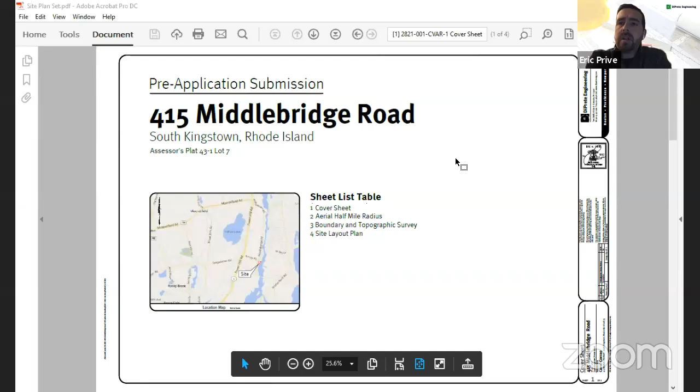So the property is located at 415 Middlebridge Road. There we go. Perfect. Thank you, Jay. It's Assessor's Plat 43-1, Lot 7. It's a 3.13 acre parcel. It's zoned R20, so 20,000 square feet per lot. I'm just going to draw on here. There's an existing home on the property, here at 415 Middlebridge Road.

There's a driveway that comes in directly off of Middlebridge Road, has a small circular driveway, and also goes to the garage. Just to note, north is actually showing to the left on these plans because it fit on the page better. There is a coastal feature located along the eastern side of the property, with the wetland flag series along here. It's a wetland associated with the Narrow River. There's an existing dock as well.

You can see the tree line goes right to the edge of the coastal feature today. So this is all a grass yard associated with the existing home. This area is serviced by municipal water and sewer directly in Middlebridge Road. There's a gravity sewer line directly in front of the property, and the existing home is serviced by the gravity sewer.

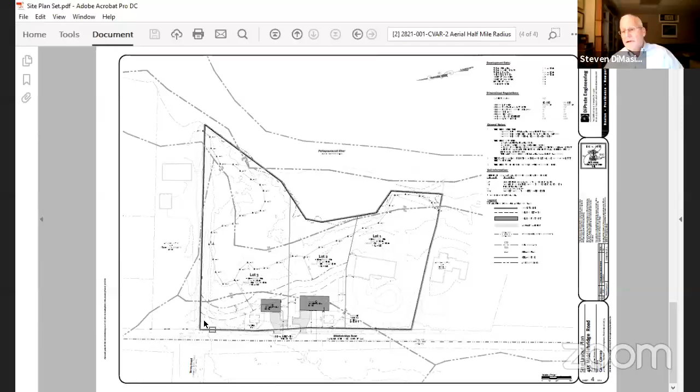Thank you, Eric. Any questions from board members? I have one. Go ahead. Mr. Prive, given the fact that this is within the Narrow River watershed, have you thought at all about trying to protect the integrity of such with future homeowners, say any limitations on pesticide or herbicide use? We haven't specifically discussed that yet. At the same point, I think that would be something that CRMC would also be talking about at that point. Actually, I forgot a pretty major point on this, so I apologize.

As I mentioned, the tree line today is approximately right along the coastal feature here. The area within 50 feet of this coastal feature would all be replanted and reestablished as a vegetated buffer zone in here. So that would be recapturing an area that is currently lawn today that would be vegetated as well. I forgot that's kind of a major feature to forget there, so I apologize for that. But yeah, this will all be revegetated and reestablished as part of the CRMC permitting process as well.

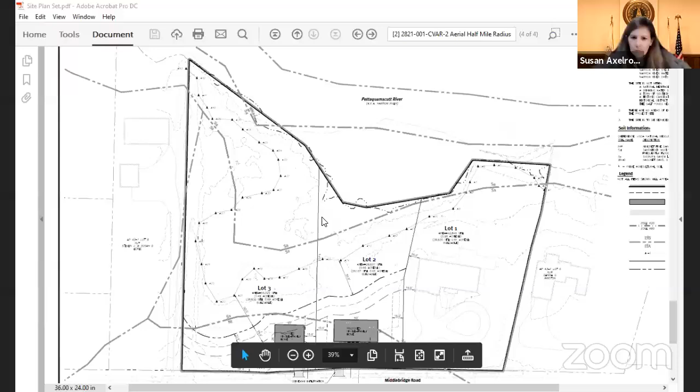So, Ms. Mack, we have not fully discussed that, but I would envision that CRMC would also have some sort of discussion like that as well. Great, thank you. Anyone else? Susan? Prive, this is Susan. Had you considered doing a shared driveway? We hadn't. It's something that we can talk about with the owners as well. It may make sense in this application. So yeah, it's something to consider for sure.

Typically, we do ask for those quite often in cases like this. And to Susan's point, because they're so close together, it seems like it would be better to combine them. I don't know if Rich has any comment about the curb cuts along that part of Middlebridge Road, but that is in the vicinity of where Torrey Road comes down, so.

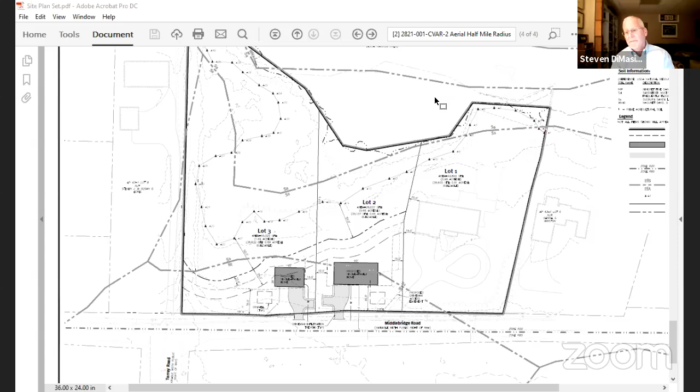It is, but we've installed a stop sign there recently. And so traffic is slowing down through that area as it comes up to the stop sign. Also across the street from this is a land trust property. It's vacant. So I'm not necessarily too concerned about driveways, although we always prefer that it would be a shared driveway, just fewer curb cuts the better, so. Okay.

Any comments from staff? Mr. Chairman, our only primary one, and it may be something the applicants considered, is the northernmost lot and the proximity of that turnaround and the functionality of that long-term, basically right on the property line. Well, that might have to be switched if they do the combined driveway.

Could you please just restate that, Mr. Rabbit? I apologize, I kind of missed a piece of that there. That northernmost lot, which has a southern jug handle to it for its turnaround, is on the property line. If you have the ability to slide infrastructure north. Got it. Yeah, we could look at that. We could always possibly put the hammerhead, the turnaround, and go into this side over here as well. Yep, that's certainly something to consider.

Okay. And Jay, as this project moves forward, do we have to have a public hearing because it's asking for no waivers and there's no street creation? I'm not aware of any requirement for a public hearing. Mr. Chairman, this is Jay Parker. This is a straightforward minor subdivision with no waivers, so there is no. All right. Well, I was just curious because typically that goes to the planning department and unless there is an issue, they usually move it along. If there's an issue, they usually refer it to the planning board. So that's why I was asking the question.

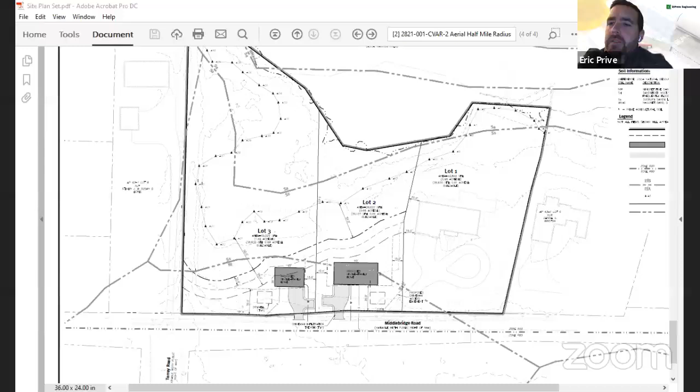Okay, Mr. Prive, do you have any questions of the board? Sometimes with the minor subdivisions, it's just helpful to get the early feedback from the planning board and make sure there wasn't an aha moment. I'd prefer to have the feedback before we go and officially engineer it. So appreciate the feedback given tonight. Well, we appreciate that as well. And you heard the comments from Maria about the CRMC maybe and the combined driveway. So we'll see you in the future. Excellent. Thanks for your time tonight. All right, thank you.

All right, moving along. Next item on our agenda is major land development project pre-app conceptual plan for the South County Post and Beam on 551 Liberty Lane, West Kingston. Do we have anybody representing the applicant, Jay? Yes, Mr. Chairman, they're coming in as we speak. Hi, good evening. David Russo, professional engineer with DiPrete Engineering, representing the applicant, South County Post and Beam. If they're present, Jay, can you let them in? Josh and Ken. Thank you, Jay. Does Jenna want to come in as well? No, it's all set.

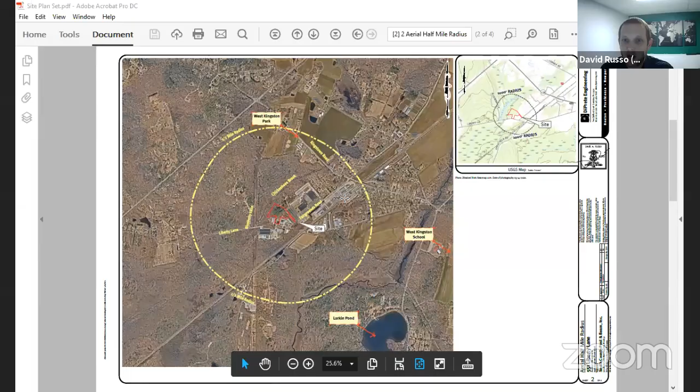So we're here tonight for a pre-application for a major land development project located on AP 21-2, lot 21. The site has a total acreage of 6.3 acres. It's an industrial zone property. It has frontage on Liberty Lane and Fairgrounds Road, so 2 points of frontage. There's an existing building located on the southern tip of the site, off of Liberty Lane. David, I just gave you control of my mouse. Can you see my mouse now? Yep. Can I click back a page too, Jay? Absolutely. All right, great.

So there's an existing building located off of Liberty Lane here. The rest of the site is wooded. They also have a secondary access point on this side of the site. The wetlands on the site are located in the northern tip, flagged by a wetland biologist, with a 50-foot buffer. The property line shown is using best available information; we haven't completed a full class 1 survey yet. The topography generally slopes down towards the wetland area, north and west. The applicant's existing business is on a separate property on the corner of Liberty Lane and Fairgrounds Road.

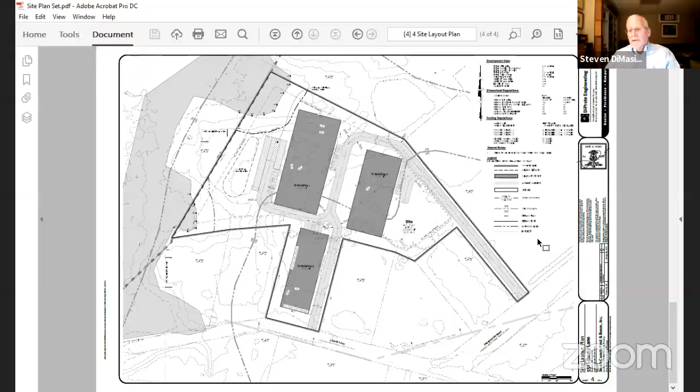So I think the discussion needs to be expanded with the applicant on the potential use of those buildings and what those pertain to, and potentially requiring to narrow that focus down. Okay. Warehouse has different implications than manufacturing. So again, I think we just need to continue those discussions with the applicant's representatives as well as the applicant. Josh or Ken, can you maybe elaborate or answer that question?

Sure. This is Josh Bouvier. Our thought process is building 2 is what we're really looking to use for our business expansion. And there's a pretty good amount of infrastructure expense and work that would make the other buildings difficult to build or plan for at a future date. So our thought process was to go and get the approvals for everything in one motion. As far as what the building uses are, we really have no plan.

We're happy to, if there's some other things we need to do, if we need more parking, whatever there might be for the most restrictive use, we're happy to address that and allow for it. But we're hesitant to take anything off the table for whatever a future tenant or future business direction might be.

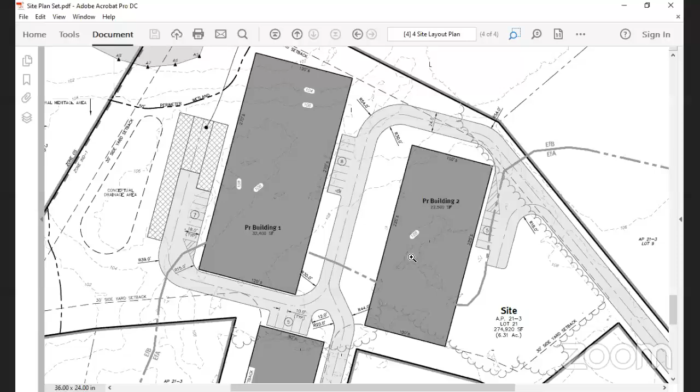So Josh, initially, if this plan moved ahead, you would start with building 2? Yeah, the plan would be to build out the full infrastructure for the drainage, clearing and roads, and then construct building 2, and then buildings 1 and 3 would be built as the need was there for them. Okay.

But as you can imagine, all of the underground water work and drainage and so forth, it's going to be pretty disruptive if we have to do that around the existing operation. And actually, I think based on a similar project, the town would require that you put in all those utilities ahead of time anyway, so. We want to go through the process with DEM to get all of this approved in one motion.

So Jamie, how could we handle reviewing this if we know the use of building 2 and they want to submit uses at a later date for building 1 and 3? Again, we can work with the applicant as well as legal counsel that it may be a phased project where you're approving one building and you're approving, in essence, the footprint of a building to be up to a certain size, and that the board still looks at the final use.

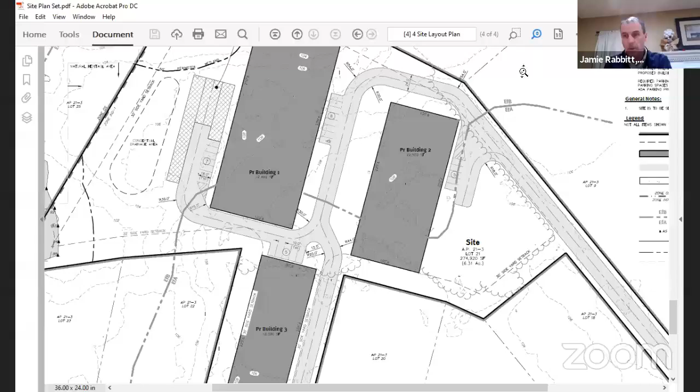It gets more into the manufacturing aspect of it. Textile production, manufacturing, food production, manufacturing, where your wastewater may change. And I'm sure John Chalk will weigh in on that, a warehouse is going to have a different flow than a wet food production facility. So again, we can look at like uses that can fall within the categories of this.

Right now you have 3 buildings with no planned loading docks. If it was a food processing facility, you're gonna have truck loading docks, and you're gonna have to accommodate a different circulation pattern for a tractor trailer. So to simply say building 3 can have any use as of right within the zone, we got to make some provisions for the uses and make sure they're accommodated along the list.

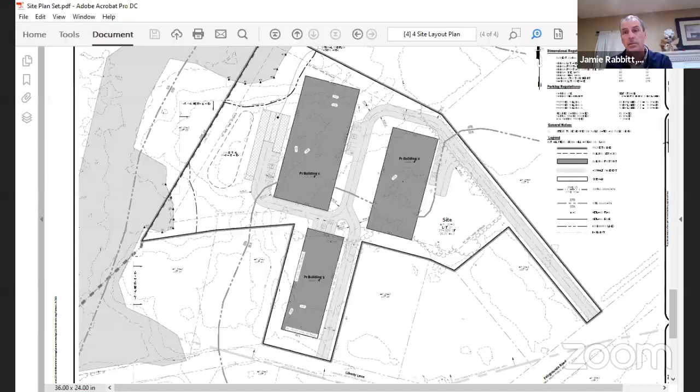I think the applicant has stated that he's more than willing to go through that exercise, and potentially there are some that the commission can deem not approved as part of this process because the infrastructure and other ancillary site conditions would be drastically modified if those uses were anticipated. So again, Mr. DiStefano, to your point, I think there are some uses we can categorize as very similar, and then other uses that we can simply categorize as very different. That sounds reasonable to me.

Okay, yeah, and you can always sit down with staff and go through the uses for that area and maybe eliminate some and discuss some, and so when you come back to the planning board, we might have some items eliminated from that. Mr. Chair? Go ahead, Jay. I just wanted to float the idea and see if this would work for both the board and the applicant.

But if the application were to proceed as indicated previously under a phased approach, with the infrastructure, let's say the utilities, the driveway, and building 2 getting approval in the first stage, but leaving the rest of the site blank until the applicant really determines what direction they want to go, it would make the second phase coming back before the planning board relatively easy because you know the size of the proposed structures essentially.

There may be some modifications perhaps that the applicant might want to entertain, but then it would give them the opportunity to really figure out what direction they wanted to go in and come in with specific uses rather than drill through the use code trying to figure out which one might work, which one wouldn't. As a former zoning official, it's always difficult to deal with an open-ended question like that. A lot of those uses, they may not have any intent to actually establish there.

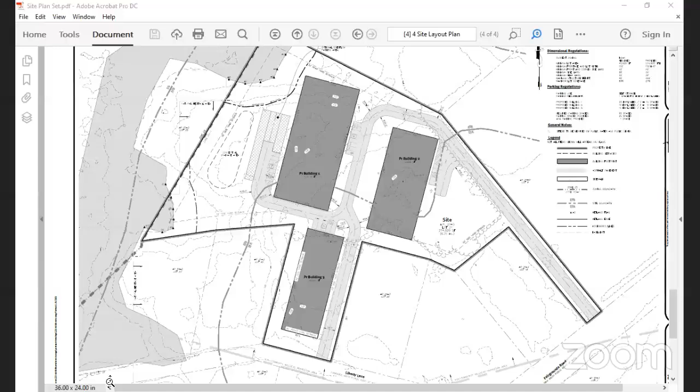I think our preference would be to combine and work with staff to come up with a reduced list of uses, and we'll see down that road. And then if we have a future use that's not on that list, then we'll come back to the board for discussion.

This is Rich Burbank. Just a quick question. I know that the new regulations are going to be out for the wetlands, new guidance on that. It does specify, I believe, from my review, that in order to submit, well, I guess it'd be RIPDES in this case, but no, it'll be a wetland submission, you have to have your master plan approval in place to even apply. So I don't know how long that is out.

Those regs are out, but now how does that affect this if you're midstream through the process and you don't have your DEM approval, you'll have to come in for master plan. I don't know how it would work.

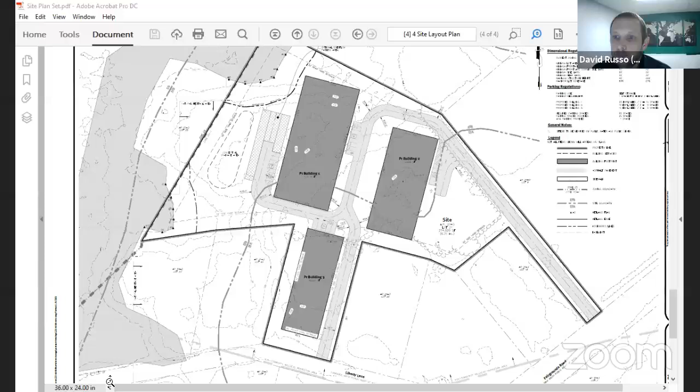I don't think those regs are, from what I gather, they have a little ways to go. There's a few questions that have been asked. They're still looking into it. That was actually one of the questions asked at the forum that they had. So I think a lot of that's still being looked into, Rich. Yeah, and that's fine. I'm just making you aware. I think that's a good point that Rich brings up, even though the finalization of the regs is still somewhat in limbo. That was something that was brought up about when the permit should be made available.

I appreciate that the applicant has come, this shows some of the benefits of the pre-application procedure, where the discussion can continue to happen and come to the planning board. And I think that it provides in the long term, this one and the last application, for a more efficient process. So thank you.

So Amy, it sounds like the applicant wants to move ahead on a combined hearing. You can add that, this is Amy, then you can ask for a motion to that effect. And Amy, as long as that would not preclude any kind of phased approach? I don't think it would preclude it. Staff and the applicant are gonna have to think carefully about how to present that to the board. I don't think it would legally preclude it. Okay. Any other comments from board members?

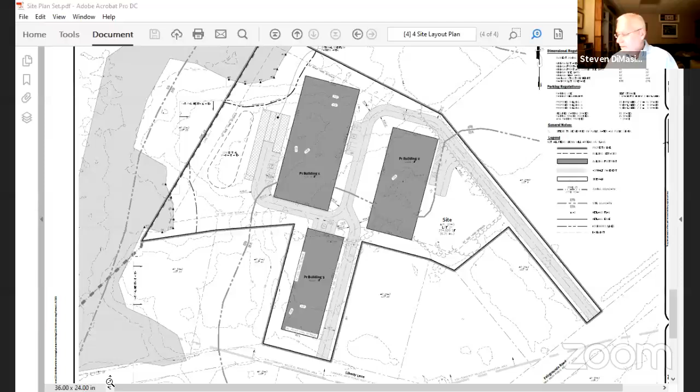All right, staff has prepared a motion for us. I'll be happy to make that motion. Okay, the South Kingstown Planning Board hereby grants the request of the applicant South County Post and Beam to combine the conceptual master plan and preliminary plan stages of review for the proposed major land development project located at 551 Liberty Lane, Assessors Plat 21-3 Lot 21. The applicant shall be required to meet the application requirements for both the conceptual master plan and preliminary plan stages of review prior to scheduling the required public hearing.

So we have a motion by Maria. Do we have a second? We have a second from Paul. Any discussion? Pam, will you take the vote, please? Yes, sir. Paul Jordan, aye. Peter DiStefano, aye. Susan Axelrod, aye. Joe Murphy, aye. Maria Mack, aye. Steve DiMasi, aye. And Pam Rubinoff, aye. Okay, motion passes unanimously. We'll see you at the next level. Thank you all. Thank you, guys.

Next item on our agenda is a major land development project conceptual master plan for the residents at Holly. We have the applicant. Mr. Holberg. Yes, I'm here. Okay. We did have a staff comment, Jamie. Jamie Rabbitt, Planning Director. I know the applicant submitted some revised plans that show some revisions to the extension of sidewalk to the north, revisions to the internal pedestrian path, as well as some architecture or renderings associated with the units being proposed to be built. We've also had discussions along the way about passenger vehicle movements along Holley Street, as well as turning into the site.

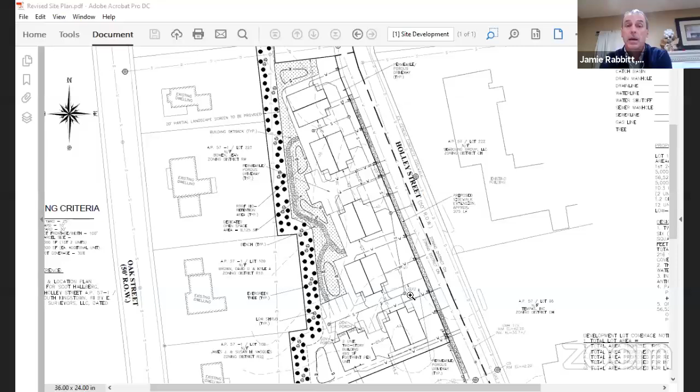So, thank you, Jay. So if a vehicle is headed north on Holley Street and they need to make a left-hand turn into the first 3 duplexes, in order to make the turning movement and get to that northeasternmost unit, that vehicle actually has to get on the southern side of that access drive. So if there was a car exiting in an easterly direction towards Holley, the car entering the facility who needed to get into Unit 1 can't make that turning movement. So either it's got to stop on Holley Street, or the car exiting the site has to back up. If there was greater dimension between the 2 units, in essence,

Jay, if you just bear with me a moment. And again, if the commission members or applicant have a question, I'll try and go over this carefully. Again, that turning movement, if you follow my cursor, that car has to turn. In order to make the swing into the garage, they have to stay on the southern side. Jamie, we can't see your cursor. Yeah, Jamie, I don't know if you have to accept the control. Oh, sorry. Jay, I'm just going to pull up a quick PowerPoint. Okay. I have the turning movements.

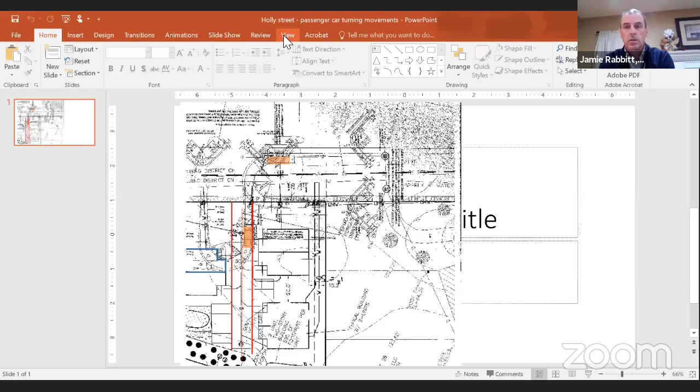And can the board members see this graphic representation? If you can enlarge it, yes. I will do so. We'll try and do this first. Is that better? And again, sorry, it's an overlay.

So the first at the top of the screen is an orange rectangle that represents a passenger vehicle. The second orange block is a passenger vehicle, which would be headed in an easterly direction to the intersection of Holley Street. To the mid left of the screen is that first northeastern unit. And what you see is that orange car makes a left-hand turn, and in order to get into that unit, in essence, is parked where that second orange rectangle is. And they're crossing the center line in order to make that turning movement.

If the units were further apart, that conflict would not exist because the driveway could be relocated between the units in a manner that eliminates that conflict. Any questions from board members on that graphic? Right. The turning, just for clarification, Mr. Chairman, the turning templates are from the ITE manual. Okay, to the traffic engineers. All right.

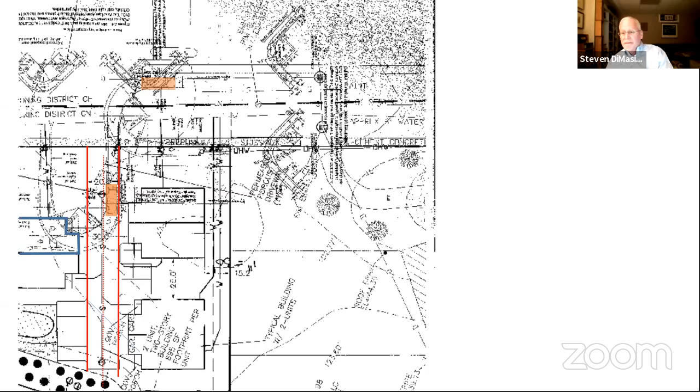Mr. Kenyon, any comment on the issue that Mr. Rabbitt has brought up? For the record, I'm John Kenyon, attorney for the applicant, Scott Hallberg. This is actually the first that I'm hearing this. I don't know if the applicant or his engineer were made aware of these issues. The applicant's engineer is not here tonight. He has his son's 10th birthday. We thought we had the engineering issues resolved on this. So obviously, in order to address those concerns, we'd have to get a traffic engineer to look at this. Okay. All right.

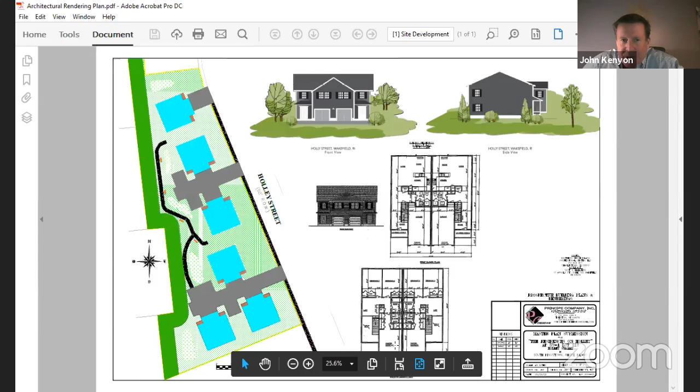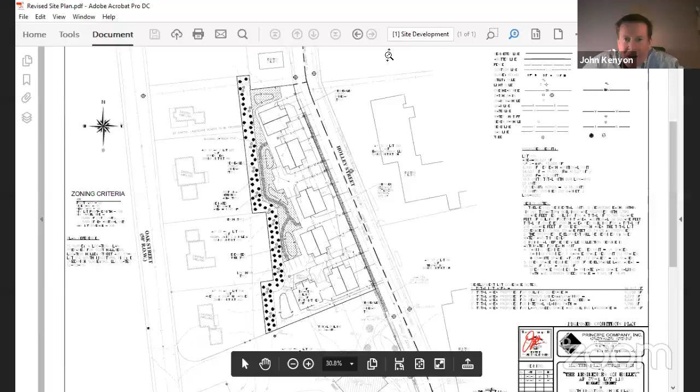The applicant also submitted some architectural designs. Yes, so at the last meeting, there was a request made that the applicant provide a breakdown in the amount of the property covered by buildings, driveways, the buffer, and the remaining land. So the plan that's up there now actually shows it color-coded, and then they also submitted a revised site plan that has the calculations for the amount of land for each of those uses. The revised site plan also shows the proposed sidewalks extending along the property until the last driveway. They provided architecturals showing schematics of the proposed units.

And at the end of the meeting, the board had asked the applicant if he was willing to increase the number of LMI units. And what we were going to suggest tonight is, as the board knows, based on the inclusionary zoning, he's required to provide 2 units, which are also the density bonus. And the inclusionary zoning requires that those be at 80% AMI. So tonight, the applicant was going to propose an additional LMI unit for a total of 3, but with the third unit to be at 120% of AMI. My understanding is that that unit would still count towards the town's goal of 10%, but it would also provide a range of affordability, which is one of the goals of the town to provide multiple types of affordable units.

John, I did notice on that plan that they haven't been identified where those units are going to be. And they should be, at least the 2 that were proposed. And if you're going to offer a third one, they should be labeled on that plan, so we know which units they are and that they're distributed throughout that development. Sure, we can do that.

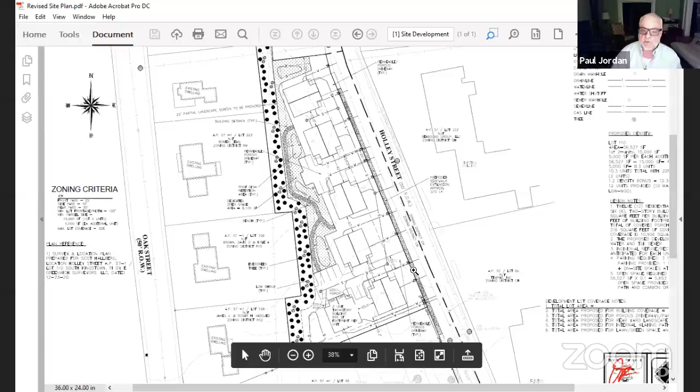Thank you, Mr. Kenyon. Other comments from board members? Paul Jordan. Go ahead, Paul. I just have a question for Jamie about this turning radius question in that southernmost driveway. I'm curious about sight lines across the lawn. I guess my question is, is that turning radius something that's required, or you just see it as a potential issue with that driveway?

Mr. Jordan, it's actually for the southern driveway entrance and the central driveway entrance. The issues are the same. Yep. And again, it's accommodating. There's maybe 7 or 8 feet in front of those garage doors to the main aisle. So because they're constrained by the 30 feet between the units, accommodating the turning movement and the radius is, in essence, you can't accommodate that unless you're on the opposite side of the road.

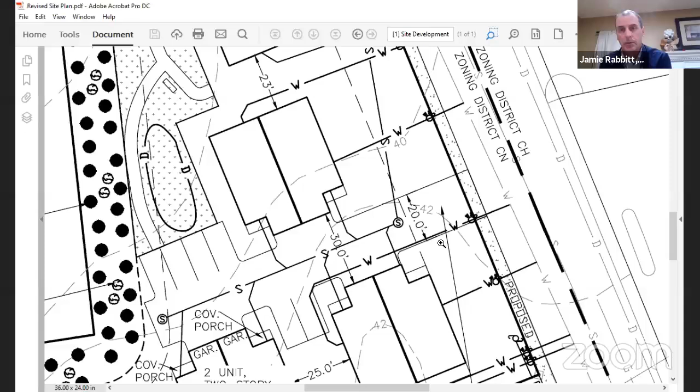But it's not a road, it's a driveway. I mean, I'm thinking, I realize. It's a driveway to a multi-family project. It's not a driveway to a single family. If that was a single family home, absolutely no issues. But it's a shared common access to the traveling public. Okay, thank you. Susan, you had your hand up.

Hi, this is Susan. I do have a quick question. Could you put up the artist's renderings of the houses again, the other photograph? I am concerned, looking at the plan, that the view from Holley Street into the neighborhood is that blank wall side of the building, and there are 4 in a row coming down Holley Street. And I wonder if you've considered maybe swinging the door around to the side with a little walking path or some other way to break up so that to the rest of town, it doesn't look like the side view of all of those buildings lined up on Holley Street.

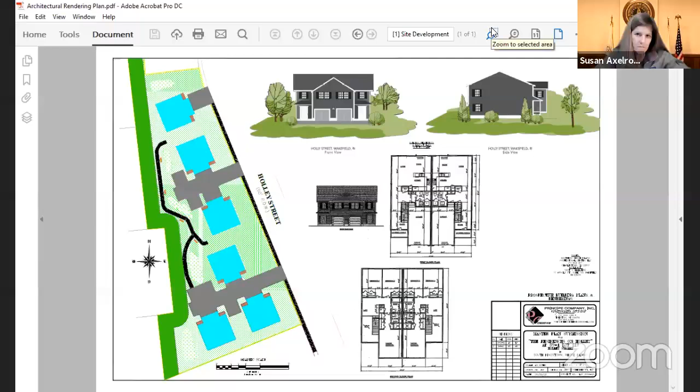I'm grateful that you don't have garage doors facing Holley Street, but the side of the building isn't very pretty. Can there be some detail added to it, or the doorway moved, or some other way to break up that blank wall? Yes, Scott Hallberg. Sure, that door could be moved. My impression from the last meeting was that we didn't want anything facing Holley Street, and that's why everything faces interior, except for the northernmost building. But certainly that door could be moved to the side.

Mr. Chairman, Rabbitt, Planning Director. I think, Mr. Hallberg, to Mrs. Axelrod's question, the orientation of the garage doors was the most concerning aspect of the development with regards to street presence. But I think you've stated that you're willing to look at establishing, in essence, a street presence for those street side units. So that would be, I think, 4 of them, correct? Yeah, that's fine. Yeah, 4. Yep, that's great, thank you. You're welcome. Any other board members have a comment?

I had a question. Jamie, with that turning radius issue, suppose he combined those buildings and he had 3 buildings with 4 units.

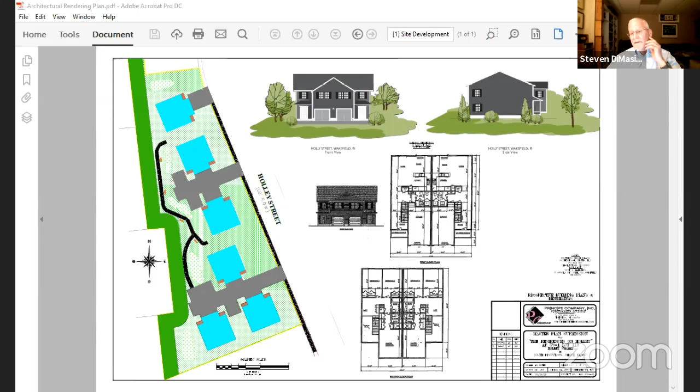That he'd be able to increase his distance between, or get his maybe 50 feet distance required, and he'd eliminate the need for that waiver. Yeah, the applicant may have a few opportunities to potentially get similar yield within the development without drawing in a Zoom setting this evening. I think from my perspective, there's an important aspect.

If the board, in working with the applicant, concedes to the fact the applicant's proposing a sidewalk along Holley Street, and that the interior pedestrian movements don't need to be formal, they could be informal, just across grass, to Mrs. Mack's point, that could allow the applicant a little more flexibility in the unit design and potentially going from a duplex to a triplex in a couple locations. But again, that's a discussion that staff would encourage and look forward to having with the applicant. Again, I know they put considerable work into this design, but there are some options available to them.

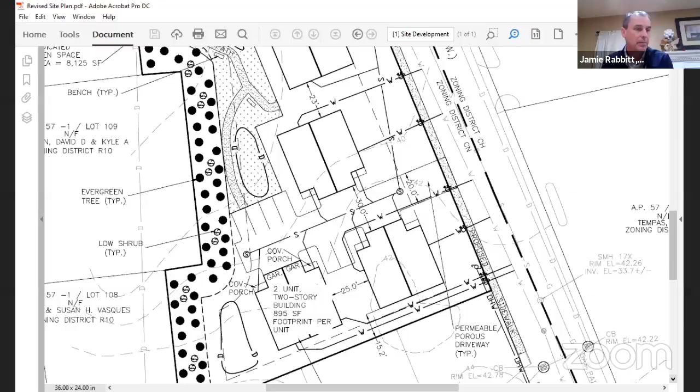I have a question. How would you look at it if we eliminated garages and just had surface parking? Again, my goal would be to eliminate the conflict, Mr. Hallberg. And again, there are multiple ways to address that by eliminating the garages, sliding some units, going from duplex to triplex. And again, I'm more than willing to have that conversation with your design team or just with you and have that discussion on some options that may be viable. Okay, thank you very much.

All right. Any other comments from staff or board members? All right, I guess, Mr. Kenyon, we have some work to do yet on this. Yes, Mr. Chairman. So the point that was just brought up, we raised at the last meeting that you could reduce or eliminate some of these waivers by having larger buildings. And we didn't think that's what the board wanted. We thought you wanted more of a scaled down residential look rather than larger buildings with more units. So that's why we thought it was in the best interest of planning to grant the waivers.

But if the board is telling us that you want larger buildings with more units, then we can certainly look into that. Well, that was only my opinion, looking at the graphics when Mr. Rabbitt pointed out the turning issue. So again, because the buildings were too close, my conclusion was that perhaps you could combine those buildings, but I don't know if the rest of the board members feel the same way about that or would entertain that. So perhaps they can have an opinion on that.

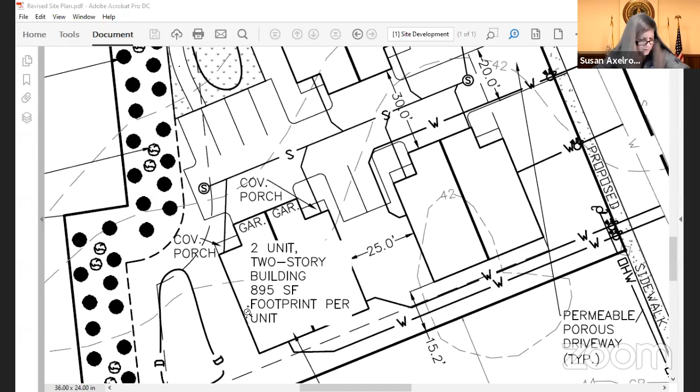Okay. Quick math. Our original notes that I have these at 2 720 square foot units. Was that never accurate? No, 720 per footprint per unit. And then there's a second floor, Susan. Okay, second floor, right? And then back out a 1-stall garage. Okay, got it. Sorry, thanks.

Looks like we have a hand up in the attendees. Jay, if you can bring in that phone number. Yes, the phone number 783-0294. If you can unmute yourself.

Hi, this is Autumn Francesca at 96 Oak Street. My question was exactly the one that was just asked previously. So just to confirm, there are 12 proposed residences, and each residence will be approximately 1,300 square feet, and they're going to have 2 bedrooms. Is that correct? I'll let Mr. Hallberg answer that. Yeah, that is correct. Thank you. Yeah, that was my only question. You're welcome. Right, while we're in the attendees, any other questions of the applicant?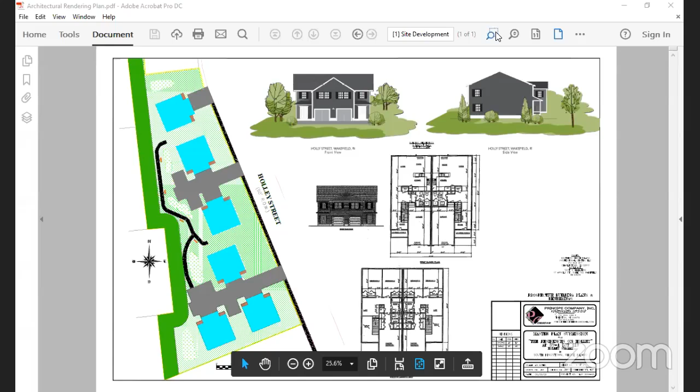There, if they do, it's an error. It was mostly architectural, not an interior footprint. That might have made it to the plan. I apologize for that. They're 2-bedroom units. This was more about the exterior architectural view from Holly Street and Oak Street surrounding area.

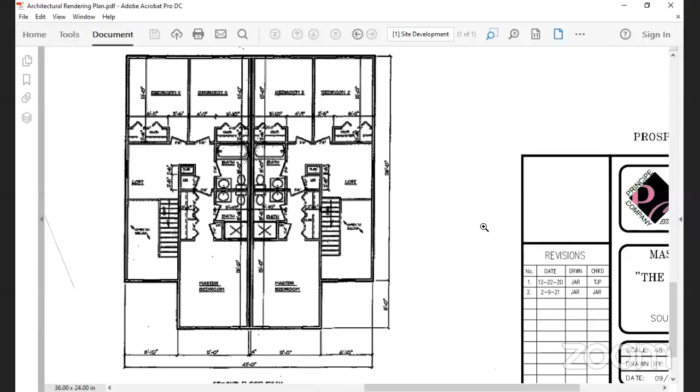Okay, looks like Sean has muted himself. No, that's fine. I was just on the clarification because it says a 2-bedroom and then the renderings show a 3-bedroom. Yeah, okay. I apologize for that. Thank you for pointing that out.

Okay, so Mr. Ken, you want to come back to us at the next meeting? Sure, Mr. Chairman. I just wanted to note that the comprehensive permit was mentioned earlier. To be eligible for a comprehensive permit, the applicant would have to provide 3 affordable units, which is what we're proposing to do. Just so the board's aware of that, my recommendation to him would be to file as a comprehensive permit with 3 units affordable.

Okay. But you do know that at this point in time, where the applicant is at with this particular project, it would probably be more efficient from a time perspective for him to continue with this inclusionary project. Don't you think? Normally I would, but things seem to keep changing as we come back. So I'll have to talk with them.

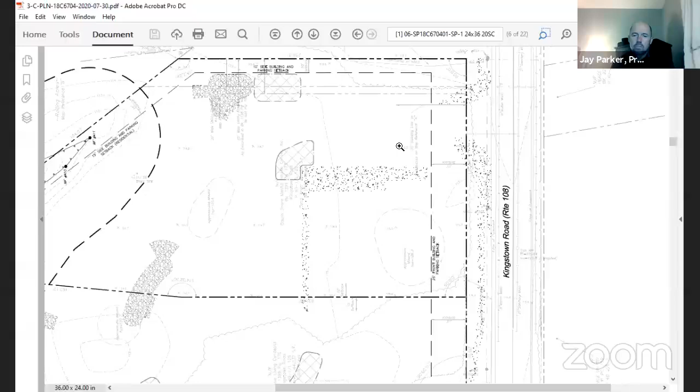So the driveway, as I was speaking about before, circling where my hand is now. As you move into the site, we do have the proposed handicap parking spaces, as this is adjacent to the main entrance of the building. We do show in this darker gray proposed parking on the side and the rear of the facility.

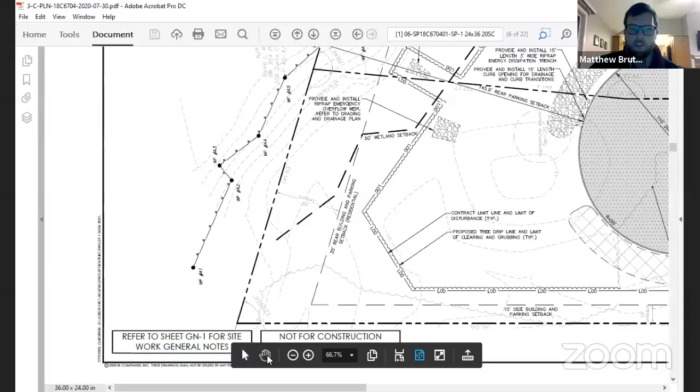These parking spaces are 9 feet wide by 20 feet deep, which is an increase in size to a more traditional parking space. The original application, when we only had 1 parcel of land and not 2, was in compliance with your regulations, but it was a much tighter squeeze for especially larger vehicles. Oops, I apologize. Let me just change this here to a hand.

As we move around the back of the building, you can see we've incorporated the additional adjacent land to provide this rear loading enclosure area and concrete pad. This will allow loading and unloading of merchandise to be walked directly back into the retail development, and also provides the turnaround capabilities for the truck on site that will not interfere with customers or employees within the parking lot.

That was a topic that was brought up during the original application as well, crossing traffic patterns with delivery vehicles. So those are a couple items that I just wanted to point out. In general, if the board has not changed dramatically since the last application, we do show sidewalk along the frontage, which previously went beyond the frontage of the property. That is now included and does go to the abutting driveway next door.

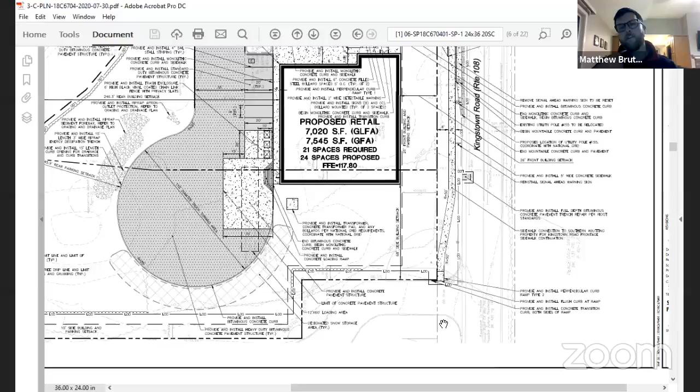And as I'm sure everyone is familiar with this area, there is a sidewalk on the other driveway for the abutter that does service an existing bus stop that is to remain. Jay, I think I can move forward a little bit. Yeah, Rob. Just gonna move forward a little bit further. This is the truck movement that was reviewed and approved by DOT, showing the truck movement off the road, circulating the site and back onto the road.

We do show here an updated grading and drainage plan. This is to comply with the 2002 Rhode Island guidelines for soil and erosion control and the stormwater manual. There is a wetland straddling the rear property line of the parcel that is to remain. There are no direct wetland impacts. The plans have also been reviewed and approved by Rhode Island DEM. I'm just gonna go forward.

And in addition to acquiring this additional land to help spread out this project to make it a safer layout, we are providing increased landscaping with a variety of trees and shrubs along the frontage and foundation of the building, spread around the parking lot, around the perimeter of the abutters and along the stormwater management system. Everything else has remained relatively the same.

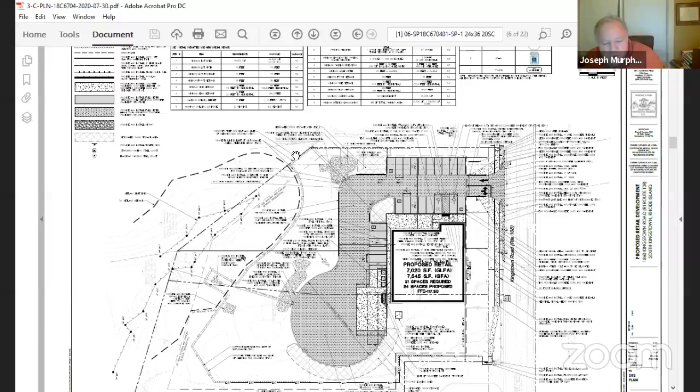Joe? Well, Steve, I think you hit the first point that I did. I appreciate the additional parking and the parking being more of a standard size. If I recall right, last time they had proposed 8 feet wide and now they're going with 9 feet wide, which is a standard. Although now they're doing the 20-foot and standard is typically 18. I'm not sure if you're doing that because you think that we wanted larger parking, but we want to meet the requirements, but we don't want to have a lot more pavement than necessary. So I would think that the standard 9x18 would be fine instead of 9x20.

And then the same comment with Steve on the back, there seems to be an awful lot of impervious. So we want to be able to have good truck movement and good vehicle movement, but there seems to be an excess of impervious right now. So let me interrupt you, Mr. Murphy, by saying that I understand that, but that was the justification for the denial by the zoning board. So we are amenable to reducing those. And I'm going back a ways, my memory could be wrong, but I believe that the parking that was proposed last time met the requirements, but in order to meet the requirements, they went with all 8-foot wide parking places, which truthfully was not practical.

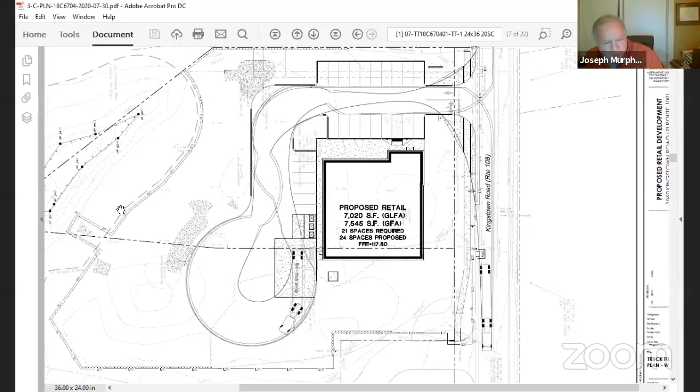And now you're proposing 9x20, which certainly the 9, appreciate that 9 standard. All I'm saying is the 20 may be a couple of feet beyond standard. You don't necessarily have to go beyond standard. And then the same with the impervious on the back. Last time there wasn't a lot of movement, but now there seems to be excess. Go ahead. We have no problem reducing it to the standard 18 feet or even reducing the impervious amount. But the zoning board in their denial about a year ago used that as a justification for denial.

So if this board wanted to recommend, as we're seeking a recommendation tonight, to reduce the parking size and reduce the radius to the absolute minimum, we would have no objection to that at all. And we will certainly make that point clear to the zoning board. Did they specifically require a 9x20? I don't recall. I will defer to the engineer. I was not the attorney of record when they went before the zoning board that evening, but I know they wanted more parking and they wanted the turning radius. We can accommodate both. We can accommodate a smaller one that meets the requirements, or we can do a little bit more if that's what ultimately the zoning board decides.

We would prefer to do what you want, which is less. Less is more in this case. Less is better. Less impervious pavement. It's cheaper. It's easier. It's better for the environment. But the zoning board may have a different view, and we want to be able to meet both of your desires. But I don't think the zoning board had a different view. The previous proposal was significantly less, and now you've gone, I think, beyond the standard and exceeded it. So unless the zoning board specifically had required you to go beyond standard, which I don't think that they had, I would say that the standard would be acceptable and would be less impervious than you have now. And we would be glad to do that. We have no problem doing that.

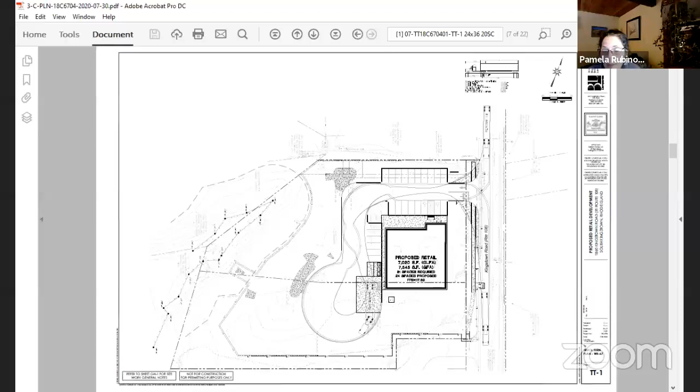Nothing to add in addition to what our colleague said. I am pleased to see here that it is a safer place, but definitely where there's options to reduce the pavement and the impervious given the close wetlands, et cetera, I would encourage them to look at that. Okay. I agree that the addition of the lot, as I believe I was the one who suggested this early on, does make for a safer ingress, egress, turning movement. You're not going to see shared parking with tractor trailers and customers.

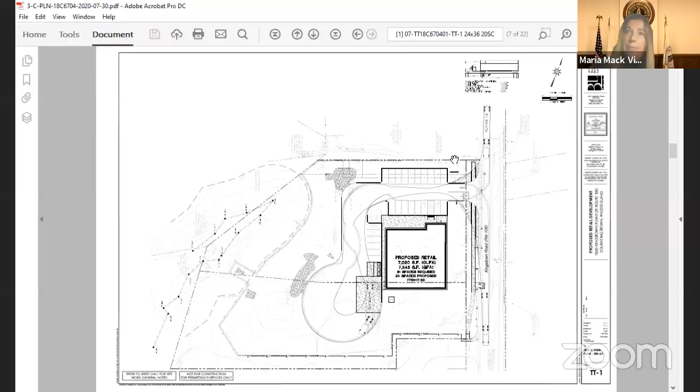Okay. Mr. Chairman, may I ask a question? Yes, Rich. You know, this is really sort of the first time I think I've seen the plan. Well, I guess this week was really kind of the first time we've seen it. So I haven't really had too much of an opportunity to take a look, but can we zoom in on that entrance there, please? I don't know who's doing this, but go back to the turning radius, the previous plan, but zoom in on the entrance.

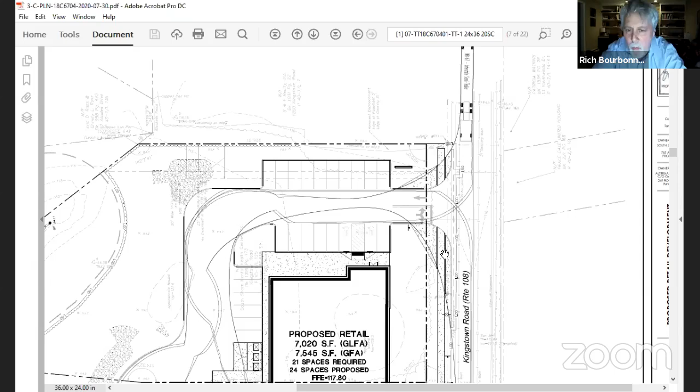So am I clear to think that that's all concrete up there, a big triangular space there, so that the wheels of the truck can go over all of that edge and then over the sidewalk? Is that what's happening there? Correct. If you could see my hand here on the cursor. Yeah, that's all concrete? This area here and this area here are a mountable concrete section to make sure that the exiting vehicle does not cross over the existing center line. And how wide is it at the edge of where the curbing is? Yeah. And how wide is that concrete? I apologize. A little delay here.

So the pavement edge is 24 feet, which obviously is channelized for the vehicle. It extends, I could ballpark it, right? This is 20 feet. Well, no, how far is it from the edge? Probably 10 feet width in the max, if we're going particular in this area, 10 feet. No, at the curb line, way out here, where that concrete triangle hits, and then where does the other end hit? Oh, here. Hold on one second. I can measure it off screen. I understand your question now.

Rich, is that curb cut got to be reviewed by DOT? Well, apparently it was, and it was approved. That's what the engineer has. By DOT? It has not? It has been approved by DOT. We have a PAP for this project.

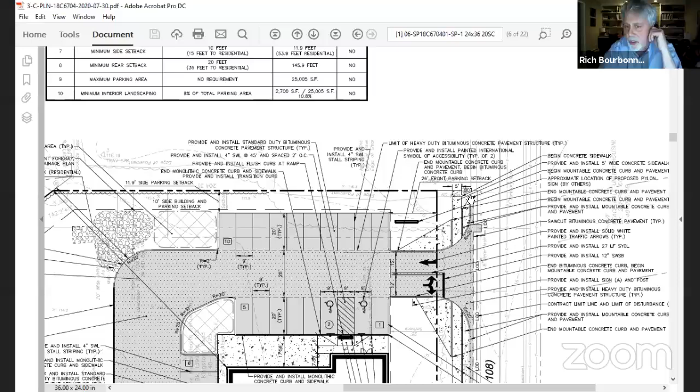I understand, but I mean, Joe, I think just physically, to look at this from the street, you know, it looks like it could be 100 feet of concrete across that. It's effectively the truck entrance. Yeah. Go ahead. Rich, from roughly where my hand is hovering north here, down to the other end here, it's approximately 88 feet.

88 feet. That's what that effective curb cut is. You know, although it's going to be curbing, that's going to be down to whatever, 35 or 40 feet. But I got to tell you, that'll be the widest curb cut that we've had in town since I've been here anyways.

And the other thing is, Matt, excuse me, Steve, I'm sorry. I was just gonna ask where the sidewalk is within that. Well, the sidewalk is a normal sidewalk. It's just that the truck will be driving over it when it's coming in and out. I mean, how often do they have deliveries? I really can't say. Once a week. Right, once a week. Yeah. So whatever, but it's still visually an 80-foot wide swath of concrete across that entire entrance.

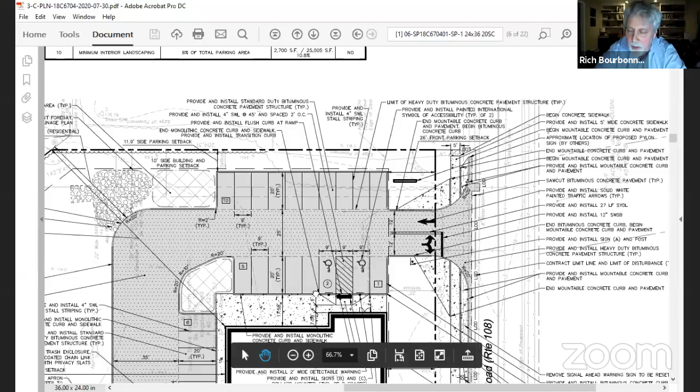That's big. Now, the other thing, Matthew, that I had discussed with the previous engineer, and I believe it was effectively handled, was I had asked because the discharge of that pond in back goes on, and again, I haven't seen a drainage narrative or anything. We will require that as part of a soil erosion control permit application, but normally it's good to get it now. I'm assuming it's been modified, but the discharge goes across property lines.

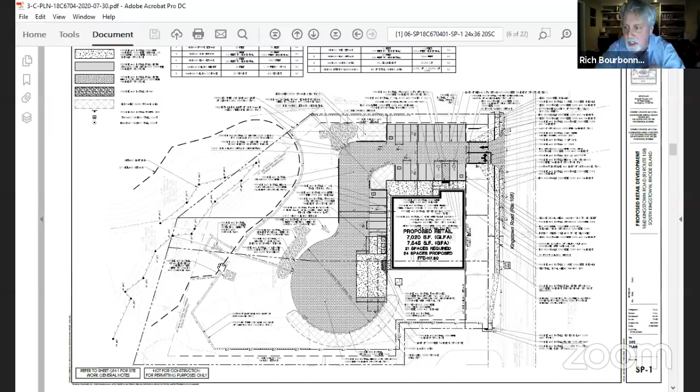At least the wetlands crosses property lines, and discharge from this property is affecting, I believe, other properties because the wetlands is so large in this area. But I asked that the 100-year storm be treated on volume. I know that normally it's 100-year on peak flow with DEM, but I also asked that we manage the 100-year volume so that's not flowing constantly for a long period of time. Matthew, were you able to do that?

Yep, great question. I do remember that from the prior application. Yes, this system has been redesigned. Obviously, we have a lot more room on site to spread out and can take a different look at it. We are still matching drainage patterns to the rear. Everything flows from basically the street back to the wetland, and that wetland does straddle property lines. We are attenuating peak flows and peak volumes up to the 100 year.

Okay, well, I'm going to take your word for it because I haven't seen a narrative, but it would be good to get the narrative, and I'll hold you to it at the time of the SESC permit. Understood. The stormwater management report was part of this submission, so I'm not sure if that got distributed to everybody, but I'm happy to pass it along again at the next step. Thank you. That's all I got. All right. Thank you, Rich. Any other staff comments?

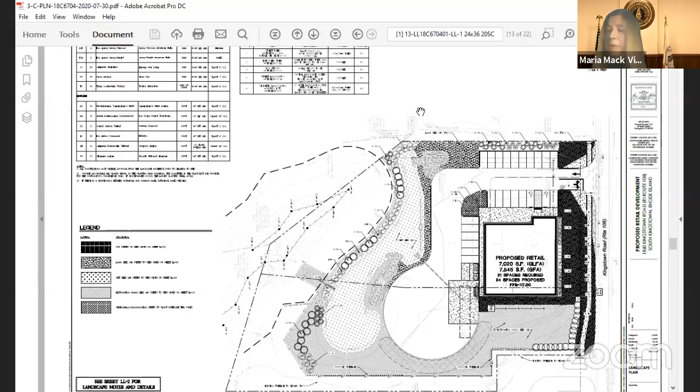Maria, did you want to bring up the landscaping plan? You read my mind. Thank you, Steve. But I also wanted to make a note that the applicant on his submission, sheet GN1, should make reference to the fact that this is in the South Kingstown Route 108 Special Management District, which has some criteria associated with it. So that should be reflected on the plan. And I have some other comments relative to that I will save for later on.

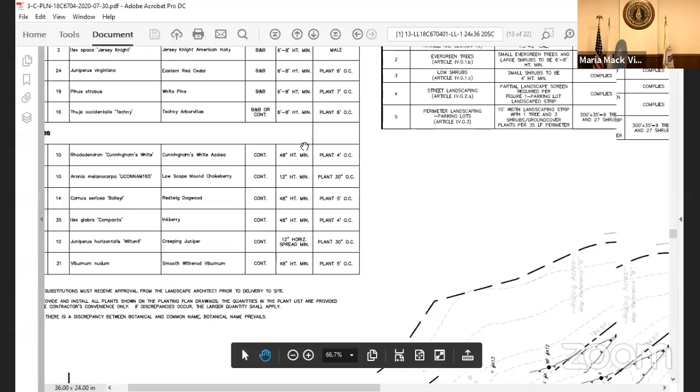I think primarily the landscaping. I have the large set of plans right here. The internal landscaping is good. The plant selection, particularly along the rear portion of the lot, is good. However, there is potential on that very large traffic circle to modify that and perhaps add some plantings. And most importantly, the view shed along Route 108, and if the engineer familiarizes himself with our special management district for this area, the plantings along that stretch need to reflect a better

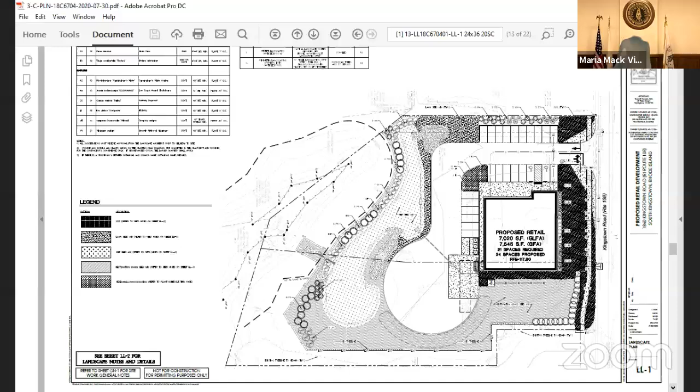design. It's primarily the southern corner of the lot that has, as we have all heard in the past, the standard straight row of arborvitae, which can be improved upon with some other species, staggered so that you don't have this straight row of plantings. And of course, they tend to be deer fodder. The plantings along the road are primarily American holly for the larger trees, but American holly, although it's a nice choice, is very slow growing, and would be better served staggered along with some street trees. So I think that's worth looking at.

The Ilex glabra that's in there is a smaller shrub that lends itself more to a planting along the building itself or other adjacent areas, but the streetscape is of utmost importance. And the other question that I have, I'm not sure if your landscape architect is here this evening, is at the entrance, immediately to the right, there's a triangular area that's difficult to discern, and a larger area beyond that, it looks like there's a spot for a sign. And that is also an area that can and should be

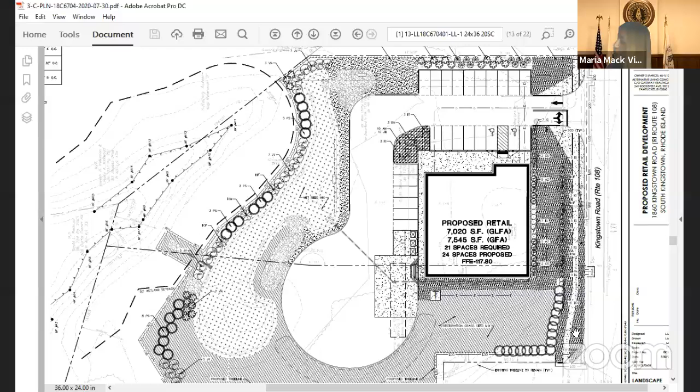planted with appropriate street trees or other species, because we all know that adding plantings helps to mitigate the impacts of stormwater. It serves as an aesthetic area. So that's something that I would like to see modified, and I think it could be done fairly easily. The plantings adjacent to the building themselves are good.

Only thing I could add to that is the southern end of that building looks like there's no windows or any kind of design on it. And I think we need some kind of landscaping to break up that big blank wall. Whether some trees through there, just to break it down a little and make it a little easier on the eyes. And with what the applicant will save on fewer parking spaces, he could put into landscaping. There you go. You always have an answer.

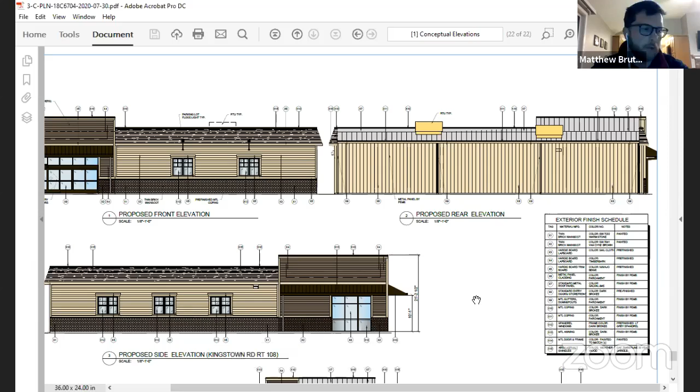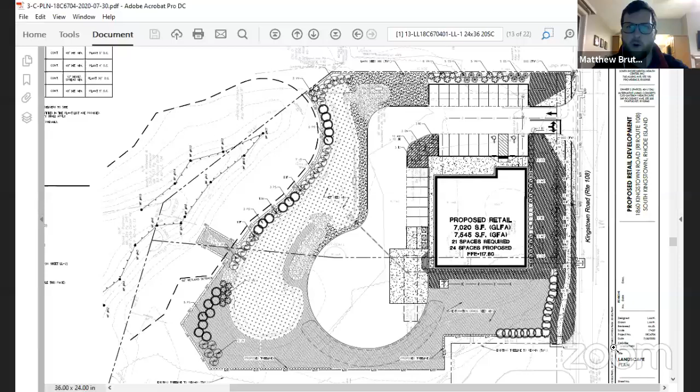Mr. Chairman and Ms. Vice Chair, happy to be, I'm not the landscape architect, I'm the civil engineer, but the landscape architect is a BL employee. Happy to revisit with them to stagger trees, look at a variety of species, add some plantings along the southern wall to address your comments. Obviously, we want this to be aesthetically pleasing, and I think it'll be a welcome addition along this strip, as it is a vacant parcel now that is quite overgrown with trees and underbrush.

Maria, if you want to give us a suggested list of species, we'd certainly consider them. Here's your chance. I would be happy to do that. I could make certain that I send those along to staff and they send it to you folks. Thank you. Other board members have a comment on the landscaping?

I see we have a hand up. I don't know if it's in regards to the landscaping, but maybe we can. I think that number was up before, Jay. That might be Francesca. Hi, yeah, no, it's not related to landscaping. So if you want to continue with that discussion, it's a different basic question. Okay, thank you. All right.

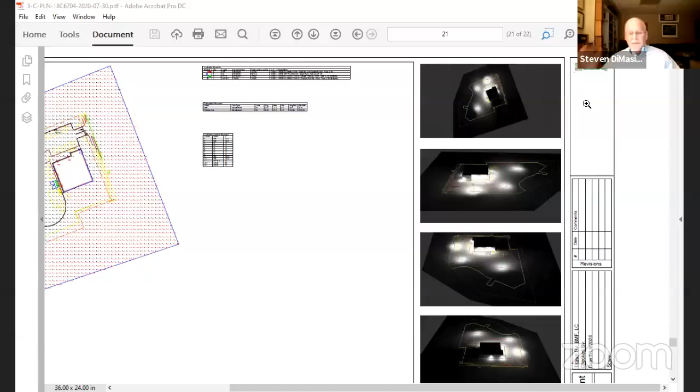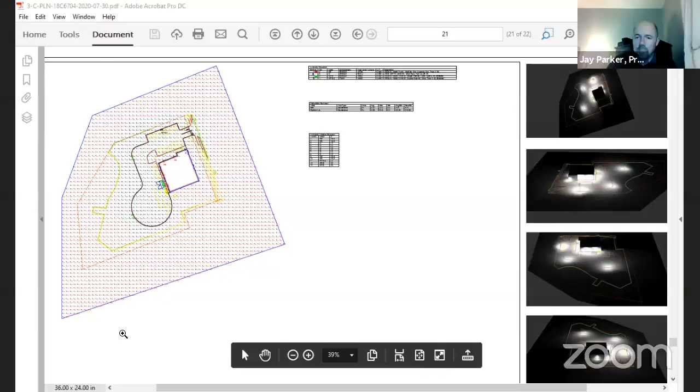All right. I saw there was also a lighting plan presented. Did planning board members have any questions on that? Our resident expert, Joe. Are you talking to me, Joe Shikachi, or Joe? No, Joe Murphy. Okay, I was going to say I'm not an expert in lighting, but thank you. No, I don't have any questions, Steve. Okay. Staff have any comments on the lighting plan? I do not, Mr. Chairman. I think Jamie might have lost connection. Okay. He is trying to get back on, but to my recollection, my discussions with Jamie was there was no concern with lighting. All right. Well, if there's no other general questions from board members at the moment, I'll turn it over to questions from the attendees.

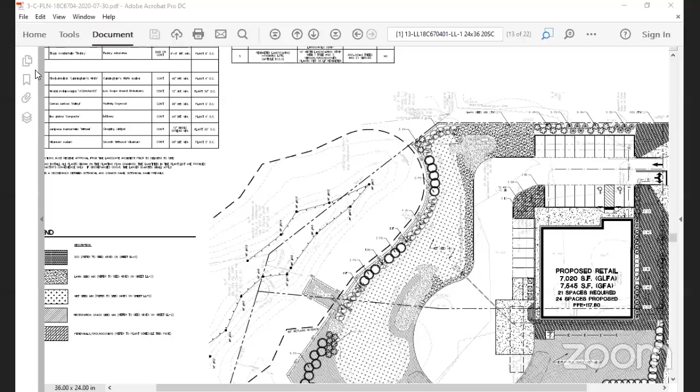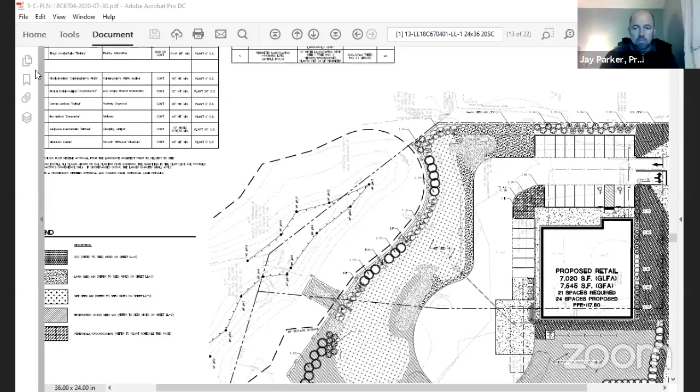All right, Jamie Murdock has his hand up. Go ahead, Jamie, if you want to unmute yourself. I have a document. Can I share my screen? Jay, can you handle that? Mr. Murdock, is it the document that you distributed earlier today via email to our department? Yes. Why don't I bring it up on my side and then I'll give you control. How's that? That's fine. Give me 1 second. Actually, I can't give you control. Maybe I can walk through it with you? Okay, next page.

Jamie, can you just identify yourself, please? Yes, James Murdock. I live in South Kingstown, within the Kingstown Road Special Management District. I was involved in the first comprehensive plan, 89 to 91, and in rewrites, and since I live within the district, have been especially interested in what's been going on here. Last go round, I spoke about the comprehensive plan and how it's connected to this special use permit, but that wasn't fully represented in the denial of this plan.

So I want to clarify, please confirm the legal standing that the comp plan attains by virtue of this special use permit. Because section 907C says the granting of a special use permit will not impair the intent or purpose of this ordinance or the comprehensive plan of the town, which sounds like it elevates the comp plan's intent and purpose to the same legal standing as our zoning code. Is that correct? Well, I'll let Amy answer, but generally zoning code is the law.

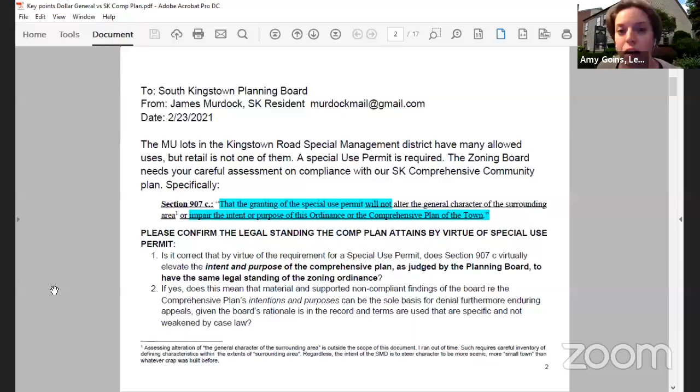Well, that depends, because I think your scenario assumes that they may not have expert testimony as to comp plan consistency, and I don't know what expert testimony they intend to present before the zoning board. Sure, they could take the planning board's recommendations or points and rebut them. And I understand the zoning board would then look at these two things and decide.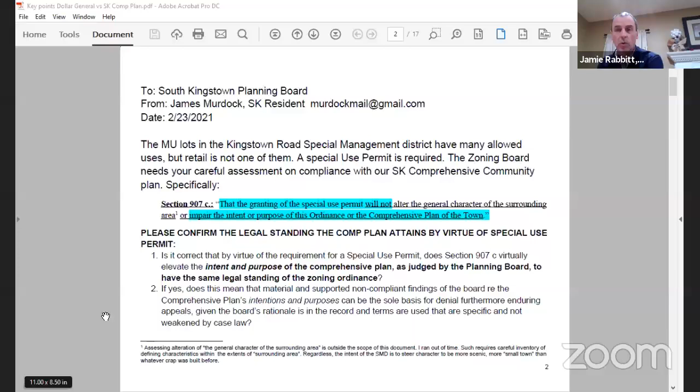Mr. Chairman, Jamie Rabbitt, Planning Director. I'd like to interrupt because... Joe, if I just one can. One person at a time, please. Jamie, go ahead. Mr. Chairman, we have 16 pages from Mr. Murdock. I think it would be pertinent if he went through those 16 pages, made points he would like to make to the planning board, and then allow either the planning board to ask the applicant to address what they felt was necessary, and/or our legal counsel or planning staff to address anything the board feels they need answered. I had the same thought, Jamie.

So James Murdock, why don't you go through your presentation? So we're not going to go line by line and discuss it. Make your presentation, and then again, the applicant or planning board members can ask questions or rebut. Yep, I just wanted to be sure that it wasn't a waste of listening time. Okay, so just please continue. Okay, page 3.

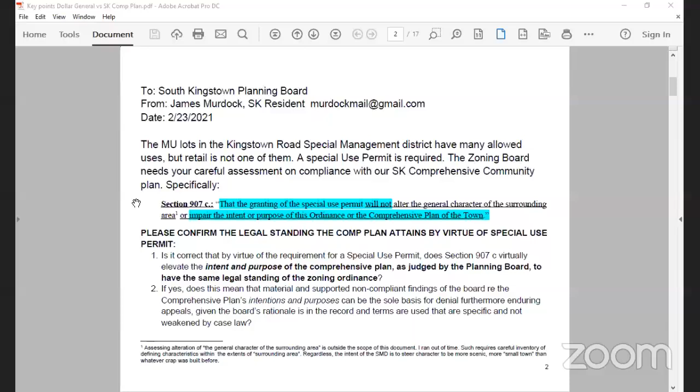This is just pointing out that in the memo from Planning Department, your findings today, or if you postpone, include that the plans for project are consistent with the comprehensive plan. It's my opinion that a lot of information is needed by the planning board, and my point in yellow is I don't believe you have sufficient information at hand.

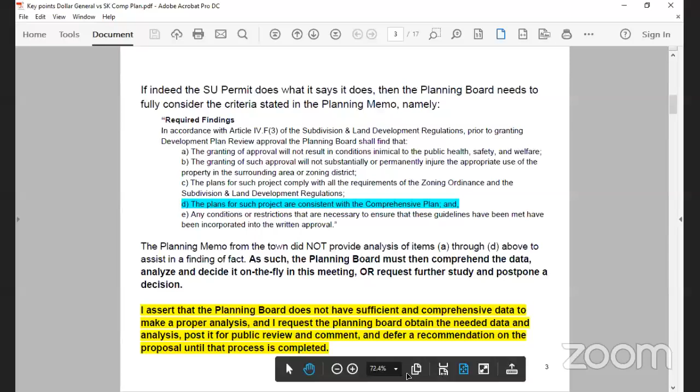I'm not done with this, and there's more, and for proper analysis, I request that the planning board obtain the needed data and analysis from wherever it chooses to obtain it, post it for public review and comment, and defer a recommendation on the proposal until that process is completed. That's my request of you today. Let's move on to the next page. Skip this.

The key statements of the comprehensive plan about this special management district is it is is a principal arterial of South Kingstown. There is a need for specialized land use planning efforts, and roads such as this quite often develop into commercial strips which exacerbate traffic problems and create visual clutter.

The discussion about what a commercial strip is was a topic at the Zoning Board of Review, where I presented what Planning Commissioners Journal did. I'm not a planner, so I'm just reporting. And the rebuttal was to have the engineer describe commercial strip development as a building with several stores in it, which in fact is a strip mall. It's a different animal. So the next page, please.

Definition of commercial strip in this comp plan, specifically in that section, is it's on principal arterial highway, having a need for specialized land use planning effort. It exacerbates traffic problems, creates visual clutter. Is that the case with this? My question to you as a criteria for judging this plan: does this application exacerbate traffic problems or create visual clutter?

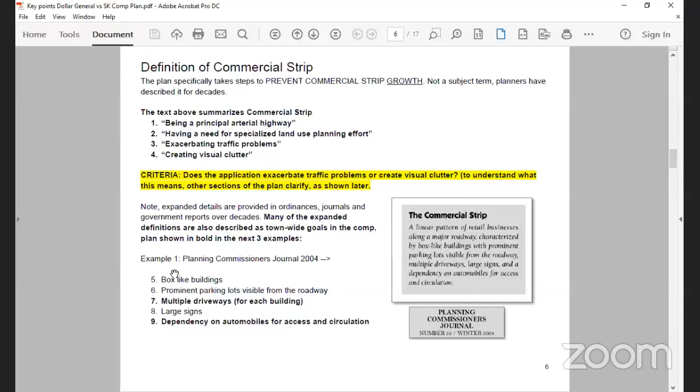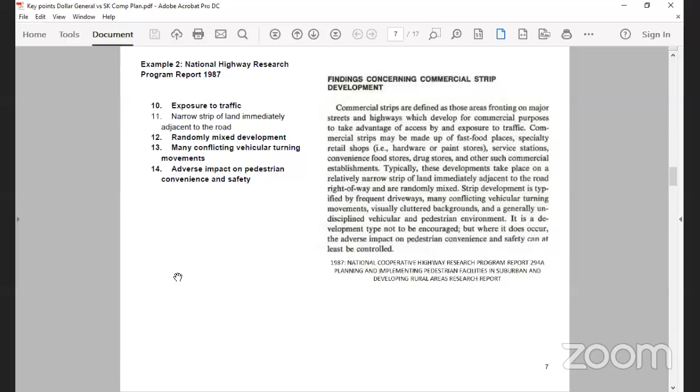The National Highway Research Program report of 1987 described commercial strip development in that paragraph. I'm not going to read it to you, but it also includes randomly mixed development, many conflicting vehicular turning movements, adverse impact on pedestrian convenience and safety. Those items in bold are supported by other town-wide provisions of the comp plan, and that's why they're in bold. Next page.

Many comprehensive plans around the country do not define it. They just say strip commercial as if it's well known. In Vermont, the state of Vermont chose to spell out specifics of what strip development is. And from that definition, I'm not going to read the whole thing, but it includes some particulars.

Point 16, limited reliance on shared highway access, lack of connection to any existing settlement, lack of connections to surrounding land uses except by highway. Both of those points are specified in the comprehensive plan and in policies of the comprehensive plan. Lack of coordination with surrounding land uses. So I've got 20 different points from industry, not my opinion. I'm just the reporter. It's for you to judge.

Do these describe this application as an expansion of the existing commercial strip that the SMD is stated to be created to prevent? Next page, please. I also copied other parts of the comp plan and pasted in here. So you'll see those with green highlighting text. That's cut and paste, basically a screenshot right out of the PDF file.

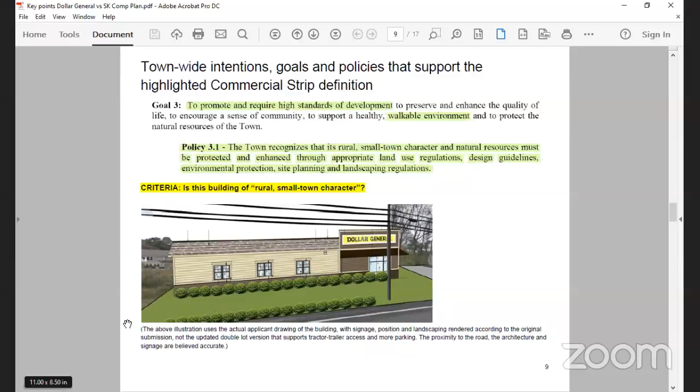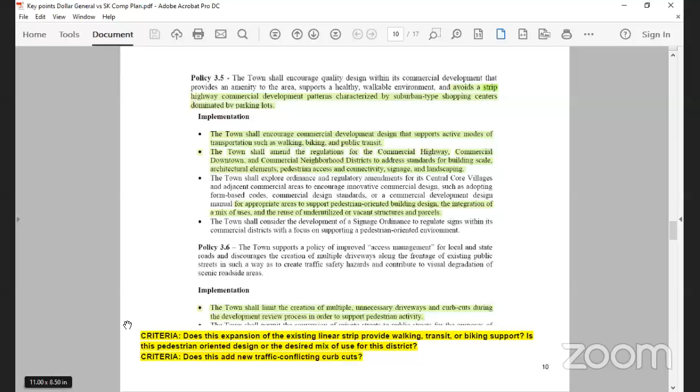The town shall encourage quality design within its commercial development and avoid strip highway commercial development patterns characterized by suburban type shopping centers. The town shall encourage commercial development that supports active modes of transportation, such as walking, biking, and public transit. I'm going to skip forward. The town shall limit the creation of multiple unnecessary driveways and curb cuts during the development review process in order to support pedestrian activity. Next.

The town supports a control of urban sprawl and dispersion by concentrating population density and infill development within villages. This is not one of the town villages. This is, in fact, the strip commercial on Kingstown Road that the comprehensive plans have consistently said need to be carefully managed to not expand and instead rehabilitate this area, which has to be done slowly as each old legacy building is replaced, have it be replaced with something that meets these goals of the comprehensive plan. That takes time.

This retail building, is this urban sprawl expansion? That's my question. Policy 6.3, the town supports the existing tourist economy, and the town supports the protection of historic resources, landmarks, scenic landscapes as important component of the tourist economy.

This principal arterial road between University of Rhode Island and South Kingstown is what every prospective URI student and their parents drive when they're checking out the town. It has tourist traffic, it has URI traffic, it has town traffic. It is mostly residential from Peacedale Mill Complex to Route 138, except for this commercial strip that we're trying to rehabilitate through the tool of the comprehensive plan. Next, please.

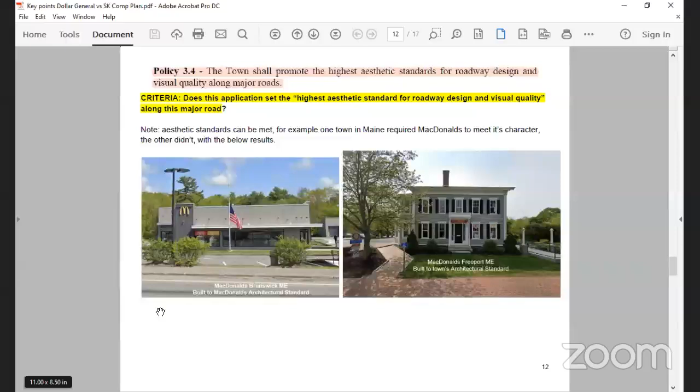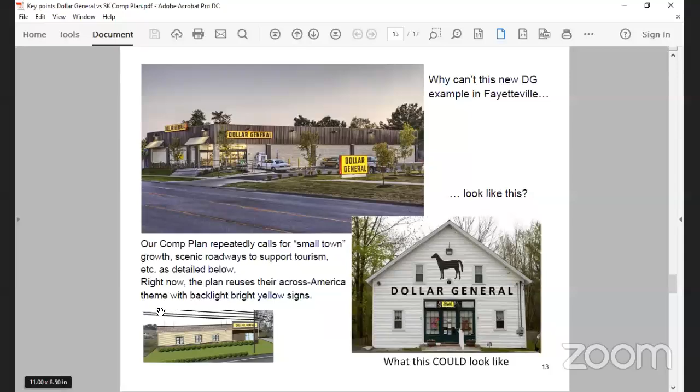Well, here's an example of a building in Hope Valley. I changed the name to Dollar General. The yellow Dollar General sign is now a little thing over the door, so people will believe that it's actually a Dollar General. That's their brand. I'm not saying this is my proposal for what it could look like, but that is indigenous to this area, and that would represent small town character. Next page, please.

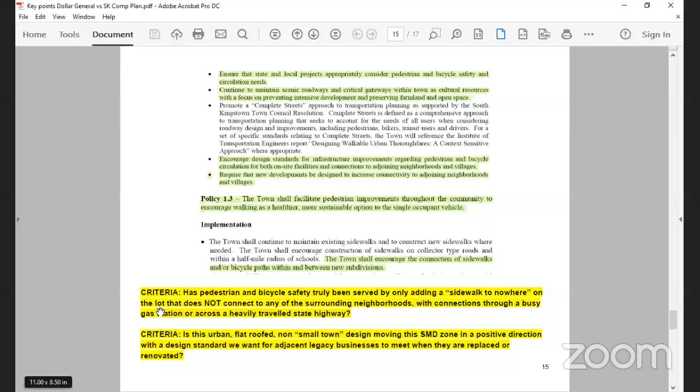Ensure that state and local projects appropriately consider pedestrian and bicycle safety and circulation needs. Continue to maintain scenic roadways, critical gateways within the town. Encourage design standards for infrastructure improvements regarding pedestrian and bicycle circulation for both on-site facilities and connections to adjoining neighborhoods and villages. Require new developments be designed to increase connectivity to adjoining neighborhoods and villages. Policy 1.3, the town shall facilitate pedestrian improvements throughout the community to encourage walking. Next.

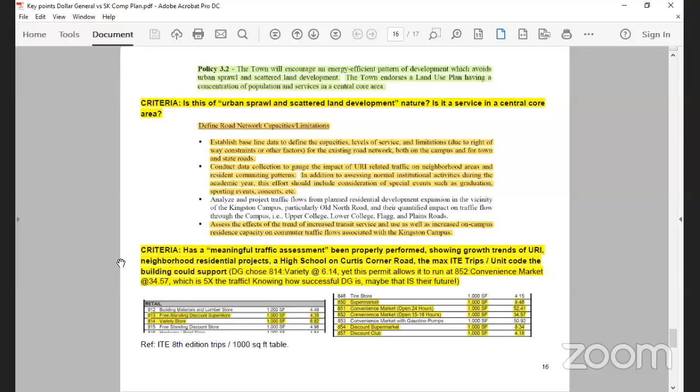So my last page is, what would it take? Instead of just saying no, no, no, well, I've studied the comprehensive plan extensively. It calls for connections to adjoining neighborhoods. I've updated, I made this drawing a lot nicer, but I can't share my screen. That's okay. But what could be done with this design?

Well, the architecture of the building could certainly be made to have the scenic small town aesthetic the comp plan describes. In fact, on my computer, I've noticed that there were several towns across the country that required Dollar General to do something that they wanted. And so they're nicer looking buildings and fit. There's one in Connecticut. I forget where the other one is. There's two or three I have on my screen as examples. It's something the company will do. We just have to tell them they have to do it. Our comp plan tells them. It's not my opinion. It's not your opinion. It's written right in our comprehensive plan.

The curb cut could be moved to a shared curb cut. You do that by flipping the plan for a shared driveway with the group home to the south. Almost looks like that driveway was designed that way for some reason. And an added benefit of that is moving that curb cut almost twice as far from the gas station. So where it is right now, it's pretty close to South Winds and it's pretty close to the gas station traffic. So you have a second popular store here, cars going in and out, close to the gas station where people exiting the gas station are looking left as they turn right.